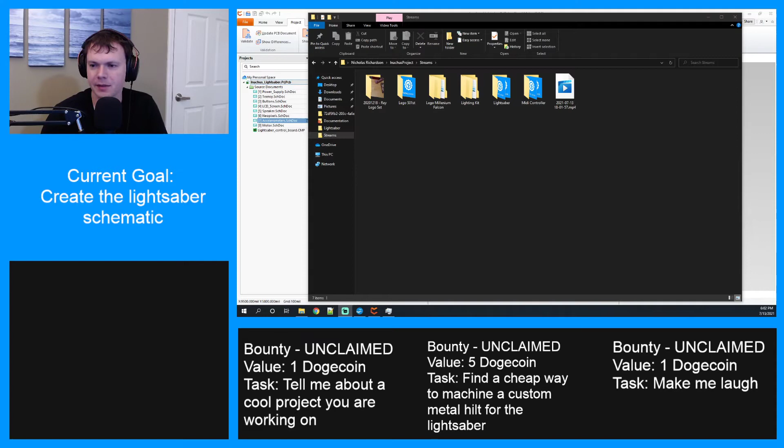We're going to be working on the lightsaber some more today. Same bounties are still unclaimed, so they are all there. And let's just get back into this. So last time we made the model for the accelerometer. So this time I should be able to just make the footprint and the schematic symbol and everything. So let me pull that up real quick.

All right. Still a couple things I need to pull up. I apologize for not having everything ready to go. The streaming software decided to just mess up right before I started, and had my microphone not working and just a whole bunch of other random technical difficulties. So combined with the Windows update and everything, it was just catastrophic. All right, but we're getting there.

Okay, so here's our bill of materials. We need to add the, let's see, not that, 2809. Yeah, okay, that's what we need to add. Where is my, I don't have my diagram pulled up. That's what I'm missing. Man, I am all over the place to start this. All right. So our two accelerometers, the Adafruit 2809, I'm going to pull those up.

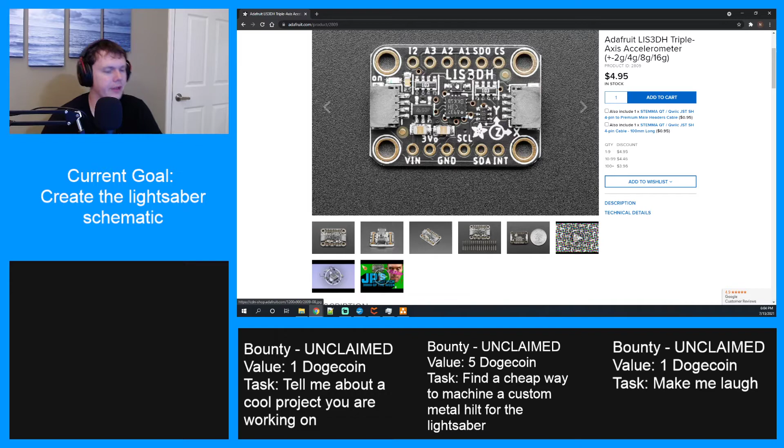And this will get us started. Okay. So it's this thing right here. So we need to go through and do our pinouts for this whole thing and make this part. And I believe down here somewhere we have a spec sheet or something. Here we go. In this file we have our layout and everything, which is what we need. Okay. So let's get started.

Parts. And then here we're going to look up Adafruit 2809. If we're lucky, we'll be able to use something that's already been made before. Okay, unfortunately, this one does not have all of the pins, so that's disappointing. Let's go to Edit. Give it a sec.

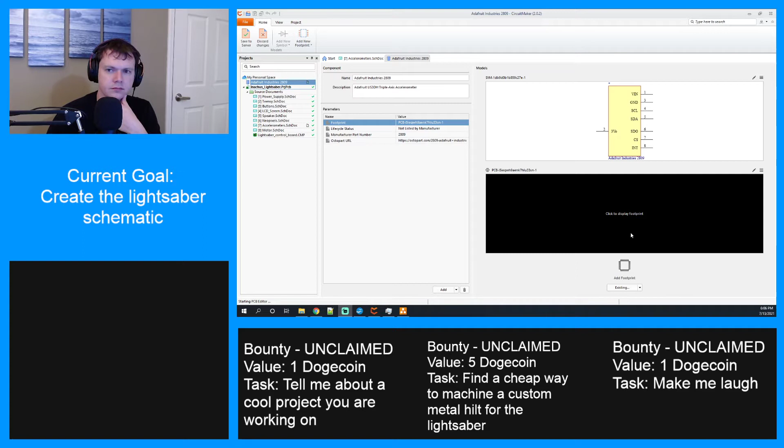All right, I don't know if this is going to display or not. There it goes. Okay, yeah, so this is an old version of the board, I think, which explains a lot. So we're going to have to modify this. So most of this that's here we can still use. So what is our... Yeah, this is definitely the old version of it. Okay, cool. At least that makes sense.

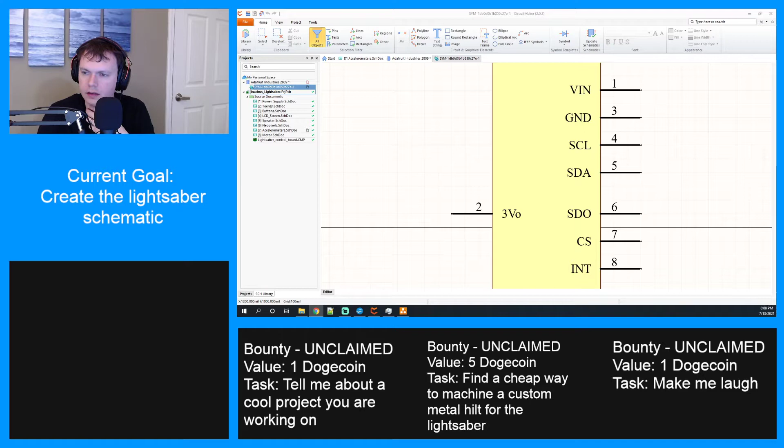Okay, let's see. If I get a better look at one of these, that would be helpful. Kind of. A1, A2, A3. Okay. So I'm probably going to reorganize a lot of this then. Well, maybe not. Let's see.

SDO, CS, SCL, SDA. It really just needs a bunch of extra ones added, and I could just throw those in up here. So I think I'm just going to do that, actually. One, 2, 3, 4. All right. So then VIN is 1. 2 is 3 volt. Ground is 3. SCL is 4. SDA is 5. Interrupt is 6, based off of this.

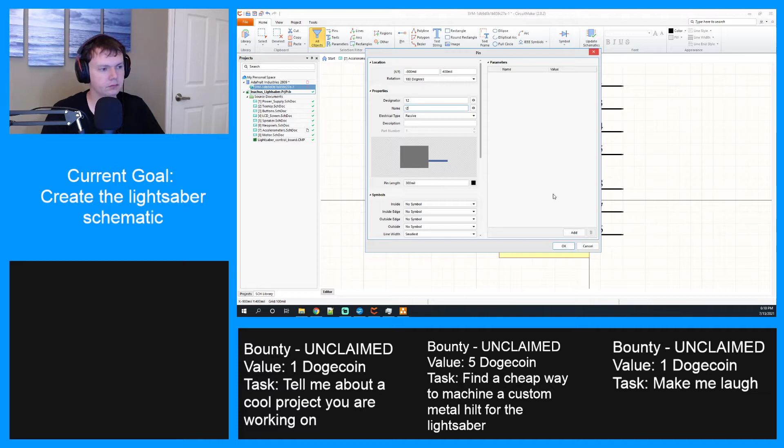CS is 7. SDO is 8. And then A1 is 9. A2 is 10. A3 is 11. And then I2 is 12, or interrupt 2, I think is what that is. Okay. So that should be everything from a schematic symbol standpoint. Let's save that.

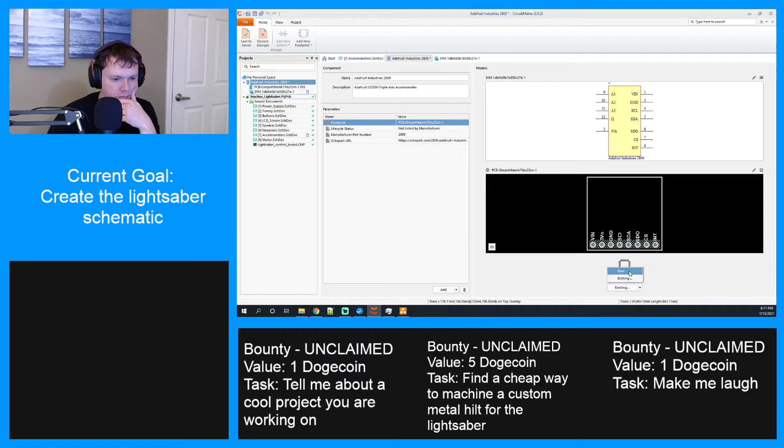And then for the footprint, I guess we edit this too. Do we edit or add? Let's just add, just to be safe. Okay. So for this, we're going to need a lot of vias. Oh shoot, what is the diameter on these? I followed some standard and I don't remember what it is.

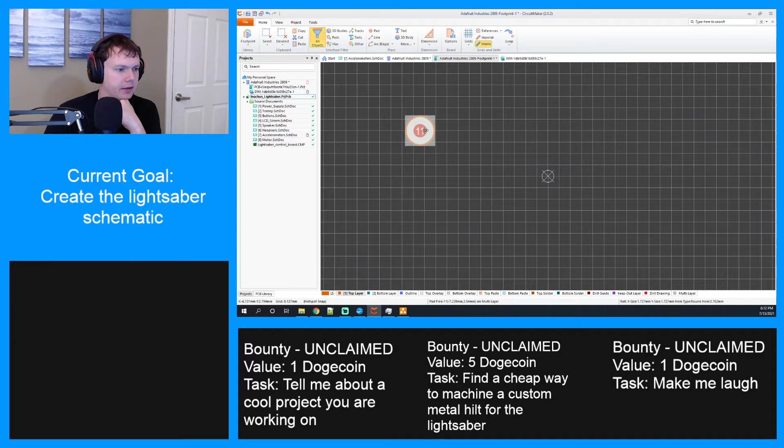Excuse me. Here, let me go look for the header that I found. That'll at least tell me. The hole is 0.9 millimeters. Okay. Let's go metric here. Okay. I'll make that a little bigger, and then there's not really much else we need to do other than name them and place them around.

I think. Oh, actually, you know what? This one I picked may not be right. Let me find. Let's pick one with the appropriate pitch. Okay, the hole size is 1 millimeter, typically. Not just this random header that I've picked. Okay. And the distance is 2.54 apart. I might make the outer a little bigger. Let's make it like 1.7, just so we have more to solder to. That's better. All right.

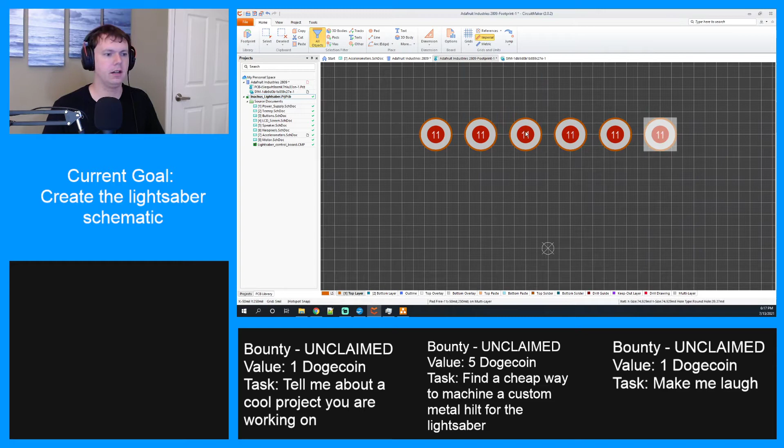Okay. Two, three, 4, 5, 6, 7, 8, 9, 10, 11. Negative 50 and 250. Negative 150 and 250. Negative 250 and 250. Whoops. All right, there we go. So that's the top row.

And then this one, basically do the opposite of that on the y-axis. Negative, well, this is negative 250 as well.

No. 50. Negative 250. Okay. All right, there we go. And now we need to rename them all from 11.

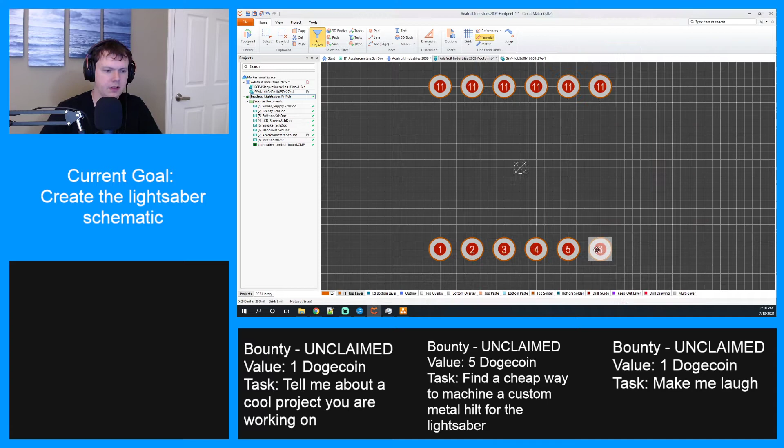So this is going to be 1, and we're just going to go around. 2, 3, 4, 5, 6, 7, 8, 9, 10, 11's correct, and then 12. Awesome.

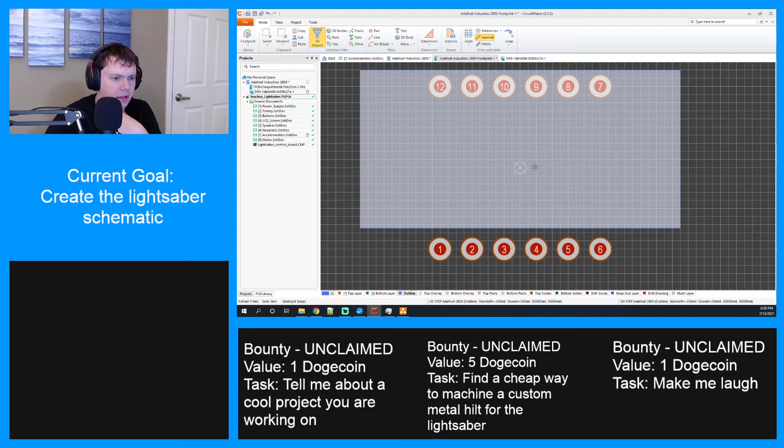Okay. Sorry. So now that's good. Let's add our model in here and then see how that does. So we're going to add a 3D body. I guess let's just go around. Okay. Generic, choose. Not that one. Hold on, I gotta find it. Okay, I think that's it. We hit OK.

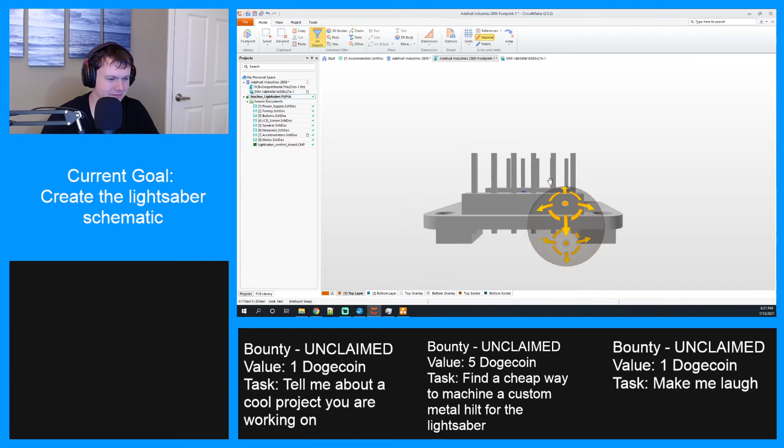Interesting. Something seems off. Right, okay. Well, it could be worse. Yeah. Alright, there's no axis in here, so we do need to rotate it. I'm assuming rotate around the X. 90? Let's start with that. Oh, that looks like it lines up better. Okay, it's upside down, but we're getting there. So let's make that 270. And then we'll probably have to move the height as well.

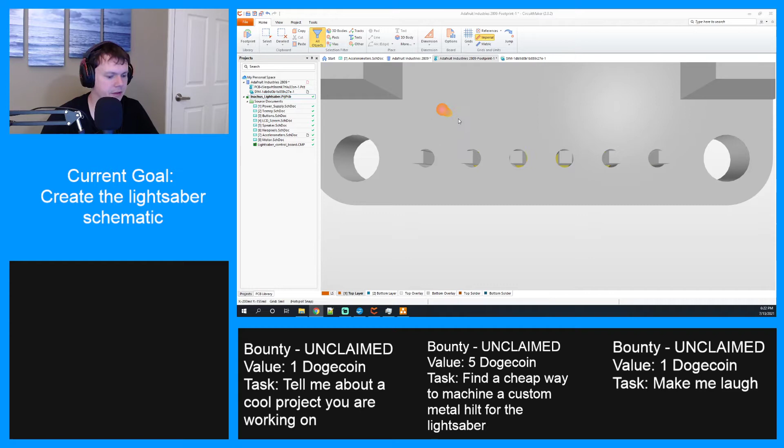Alright, we're closer. Oh, that's why I couldn't see the axis, because it was in the middle of the thing. So this should be lined up vertically. Okay, it is, I think. It looks like everything's inside is looking pretty good. Maybe. But I need to raise it up the right amount, and I don't know where that is. Let's try going up 1.5 millimeters. Alright, let's change to metric again. Alright, standoff height 1.5. Okay. Where does that put us? Not quite there.

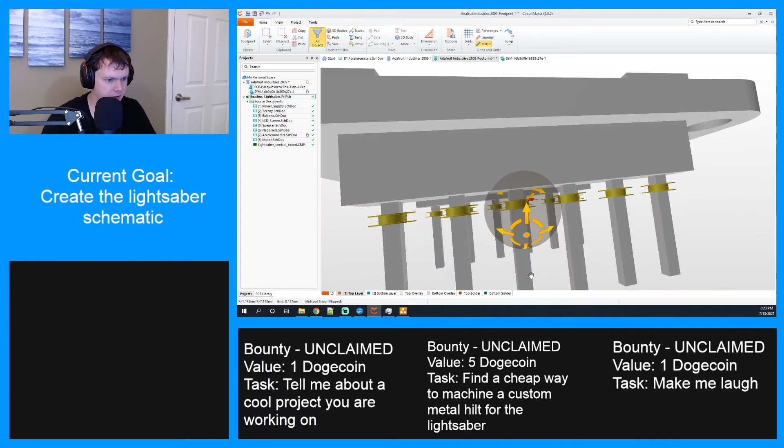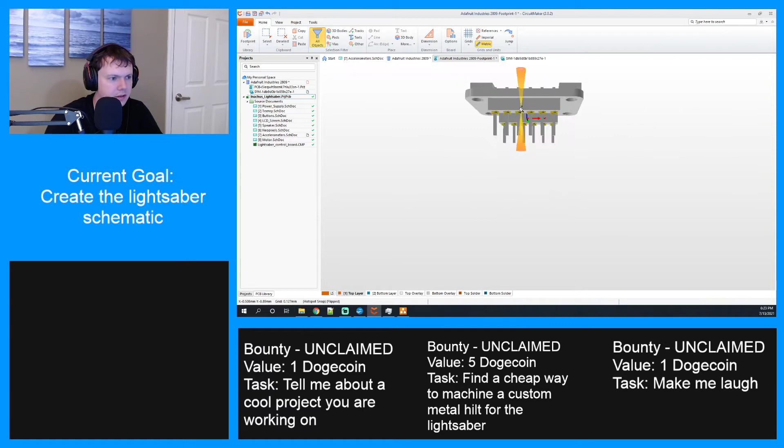Let's go to 2. Really? That's not going to do it either? Alright, let's go to 3. There we go. It's not quite that high. Maybe 2.5 is enough then. 2.6 actually, for board thickness reasons. Okay, yeah, there's a little space there. That looks good actually. Alright, let's see how we're doing. Yep, the hole size seems right. Alright, cool. So that looks good.

So now we need to do something for the mounting locations. Not that we're likely to use them, but I want to include them. I think this is really going to put in perspective too, compared to the other boards, how small this is. Just checking out these different views that it offers. Interesting. Okay, let's go back to Imperial for our measurements. All right, the next one, we need mounting vias. Do these count as pads? Can we just say via? Have it unlabeled? That makes more sense, I think.

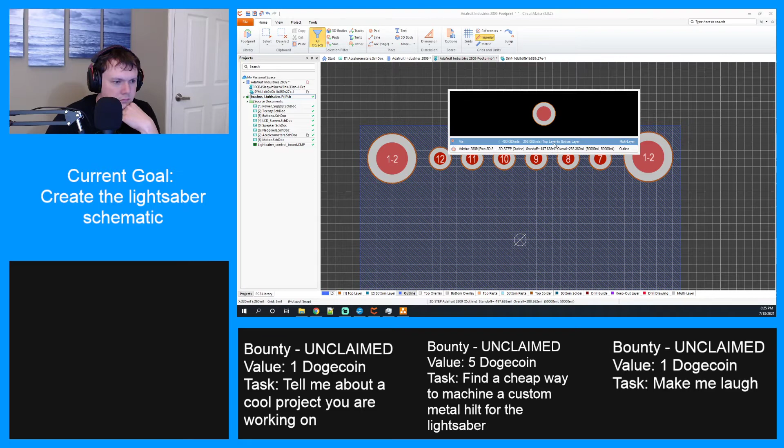Alright, diameter. I thought I set this to metric, I guess not. Oh no, I did set it to imperial. I wanted to do that. Whoops. Alright, there we go. 0.1, so 50 mil. We would want this to be 100 mil diameter. Oh, more than that actually. Maybe like 150, because the hole needs to be 100 mil. Okay, there we go. And then offsets are 0.25 up and 0.4 over. There we go. All right, let's place a bunch around.

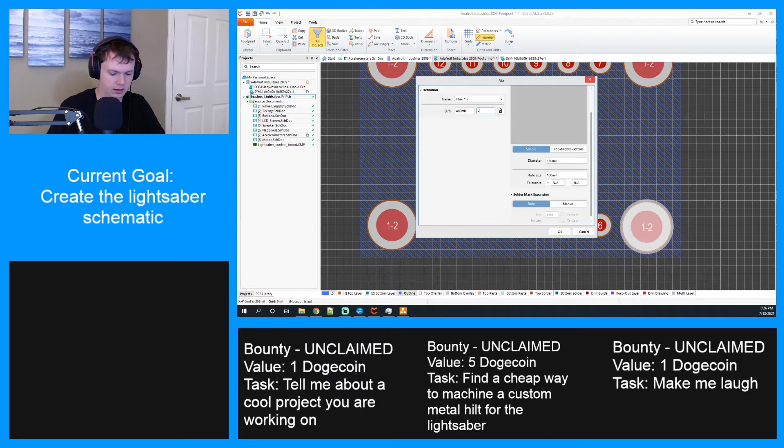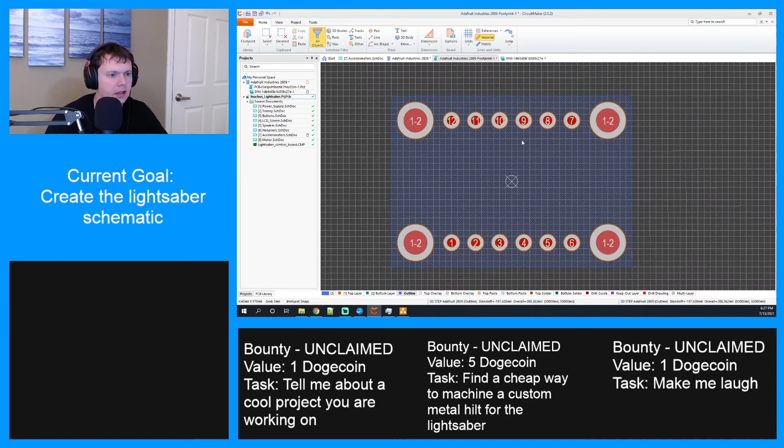Okay, so 400, 250. Negative 400, 250. Oh, shoot. Come back. Negative 400, negative 250. Negative 250. Okay. So now if I go to the three-dimensional view, we should be able to see that set up there. Yep. Oops. Looks good. I'm not sure those mounting points will ever be really useful, just because of how close they are, but maybe. I did the same diameter in the board as the upper one is, so that should be okay. Alright. That's good. Let's save that.

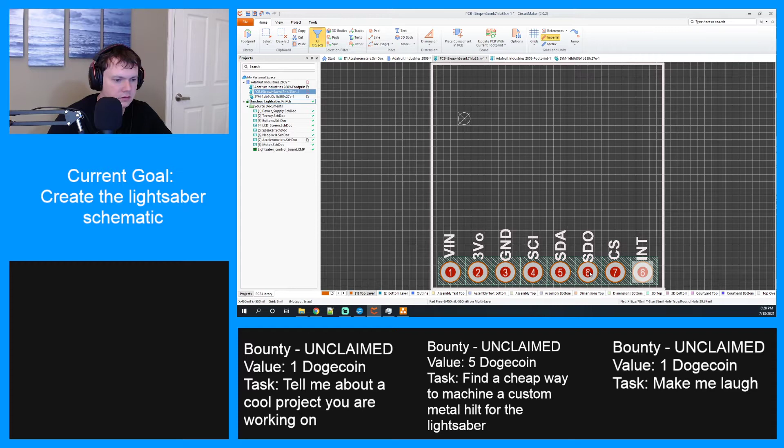I probably need to edit this one with these values in order for this to be correct, because I don't want this to be incorrect. I'm just thinking through that now. I think the only ones that are going to be correct are 7 and 8. So VIN, 3 volt, ground, SCL actually. SDA, INT. This should be INT. No, INT should be 8, so this should be 6. Okay.

Then SDO and CS are what? SDO is 8, CS is 7. So 7 is correct. This needs to be 8. And making this change will allow this to stay consistent with the schematic. Even though it's weird out of order here, it's the same as the schematic symbol, which will be good. Okay. So now we need to save this to the server.

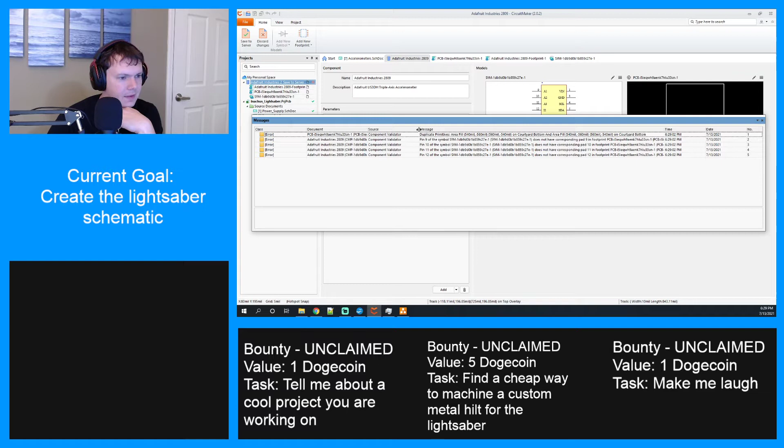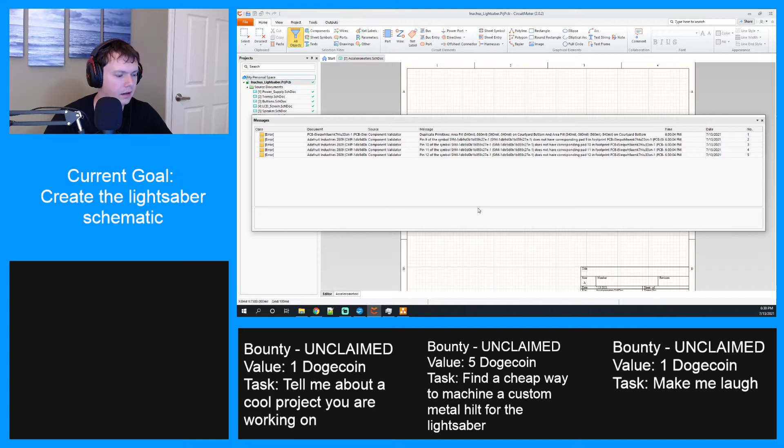Oh, validation error. No. Okay. No, don't release yet. Oh, missing footprints. That's fine. But what is this? Duplicate primitives. Area fill on courtyard bottom and area fill on courtyard bottom. I assume that has to do with the other one because I didn't do a fill or anything. This one. Yeah, alright. I'm just going to release anyway then. Let's try that again. Ignore those errors. Release anyway. See what happens. A solid strategy.

Okay. So now, I should be able to place this part. But I think the edited version is only in my favorites. This one. Oh, I might have picked the wrong one. Hold on. Come back. I want to make sure I place the correct footprint. This one. Okay. Now I can place it, and I need 2 of these. 1, 2. Okay. That's good.

Alright, I need to add these to the bill of materials now. So, our ever-growing list of parts. What was our last U component? U4 for the Teensy 4.1. I don't see any other U's. So U5 and 6 will be these ones. Alright. Don't know this one just yet. And let me see if I can find this part in like DigiKey or something. Ha, I did. Oh, and it's in stock. What luck.

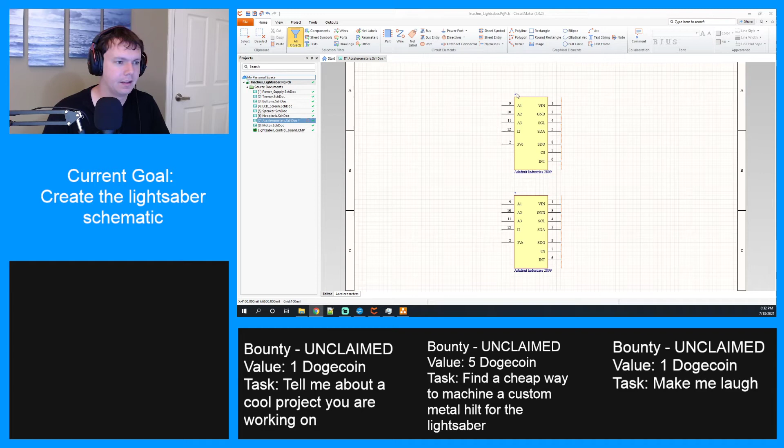Alright, part number. Try not to bash Adafruit part numbers too much, even though I don't think they're very good. They are simple, I'll give them that. But I think in this case it's kind of a hindrance. Okay. So we'll name this U5 and U6.

Okay, now we gotta figure out how to wire these up, and I think our pinout should have that we decided before. So anything that says Adafruit 2809, let's see, there's multiple, so there's a 0 and a 1. 0 will be U5, 1 should be U6. And the signal names. So we need wires to it following those names. A1, A2, A3, and interrupt 2 I believe are going to be disconnected, but I'm going to read through this data sheet, or at least Adafruit's article on it, and see what I need to do to connect up everything else.

Okay, Adafruit 0. SDO, okay. Let's just get a bunch of wires out. Because all this will likely have to be connected. I'm not sure what this does. I'll run it out anyway, but I don't see that being used. Okay, SDO is MISO. Just do net labels on everything. All right, master in, slave out. So that's the data going back. So that's the data that our actual G-force data is going to be coming back in on that line right there. So that's the first one.

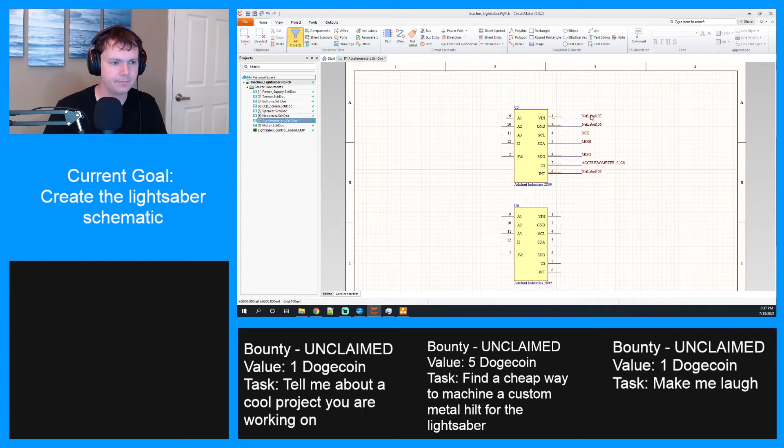Oh, okay, so 3V out. This is an output pin. We actually don't need this. Because we're not going to be powering anything off it. I wonder if it makes sense to connect that to anything. I don't think so. All right, let's just disconnect this whole wire. And then this is going to be 3V3. Obviously, this will be ground. Actually, I don't need to label that. Hold on. Let's just get our ground power port. Oops. There we go.

Okay, and then the INT, what is that? So for SPI, we need SCL, SDA, SDO, and CS. INT is an interrupt output pin. So you can configure some sort of interrupt to fire when you... That's really cool, actually.

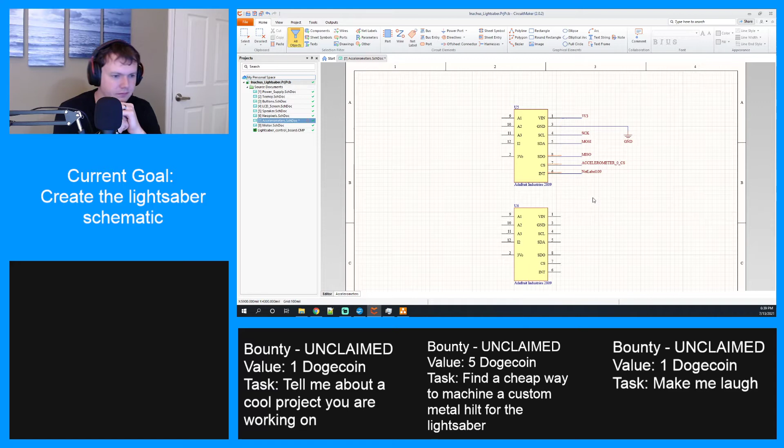Both of these, I1 and INT, are interrupt output pins. I could see that being useful somewhere. I have a limited amount of I/O left on this board, though, so I don't want to just use them unnecessarily. But I see that that could be useful in the future, rather than possibly missing data.

So I think I'm going to include that. I'm going to leave it blank for now, but I am going to include that when we do a run through again to decide what the remaining I/O should be. That'll be included. Why is this red? It is connected. Oh, it's probably not on the Teensy. Okay, let's do the other one, since we have to do two, and then we'll go ahead and wire up the Teensy with everything as well.

I can't wait to see this in the, oops, here, let's place a power port. I can't wait to see this in the 3D view and everything. I'll do that once I get all these wired up with the Teensy and everything. I'll export the changes and show the circuit board. Okay.

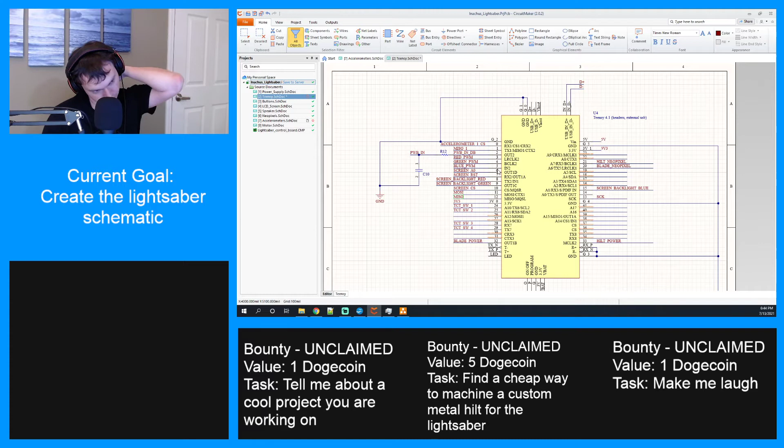Okay, so pin 0 is accelerometer 1 CS. Probably need to move that out a little bit, actually, so we get some room there. Okay. All right, what's pin 1? That's MISO 1. All right, pin 12 is just MISO. This one. Oh, man. All right, I missed one. MOSI already exists, so I don't have to worry about that.

All right, accelerometer 0 CS is on pin 36. Okay. I missed 26 and 27, I believe. Yep. 26 is MOSI 1. 27 is what? SCK1.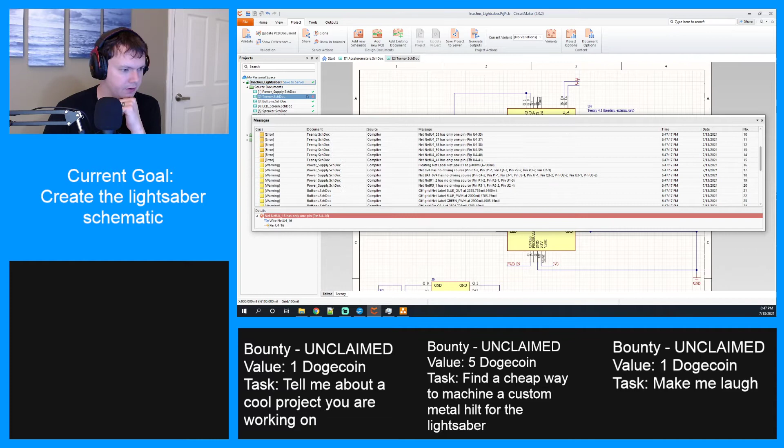All right, pins 30 and 31 are spoken for, but I don't think I'm doing anything with those yet. Yep. Okay, and then that finishes that. I did accelerometer 0 CS. What's next? I think I've almost got them all, or that might be all of them. Yep, okay, because the other things were already in there. So it looks good. If we save this and go back here, yep, nothing is red anymore, so that's good.

I just realized this is going to throw an error when compiling because of all these unconnected lines. But let's try it anyway. Validate. Net so-and-so only has one pin. It's going to make me go through and fix that. Fine.

I really do need to see what this looks like on the circuit board because I need to get an idea of our spacing. Because I know that we are definitely getting close to running out. All right, let's compile. No issues.

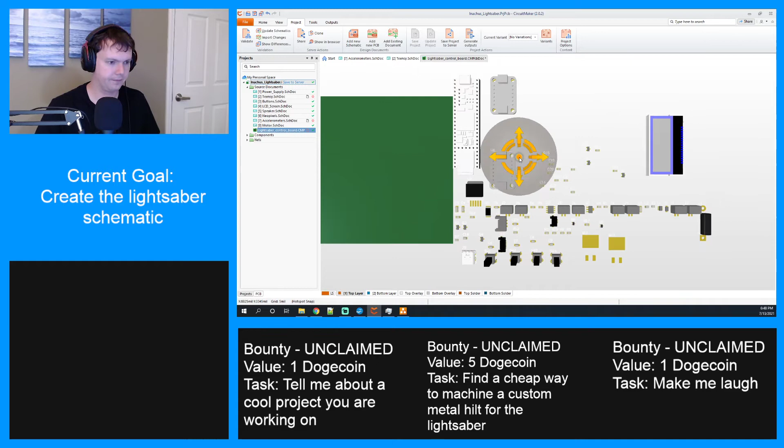Let's push the updates to the PCB. Validate everything. Unknown pins are weird. Execute. Everything executes just fine though. Yep. And there they are. All right, come here. Let's pull this out. Give it some space here.

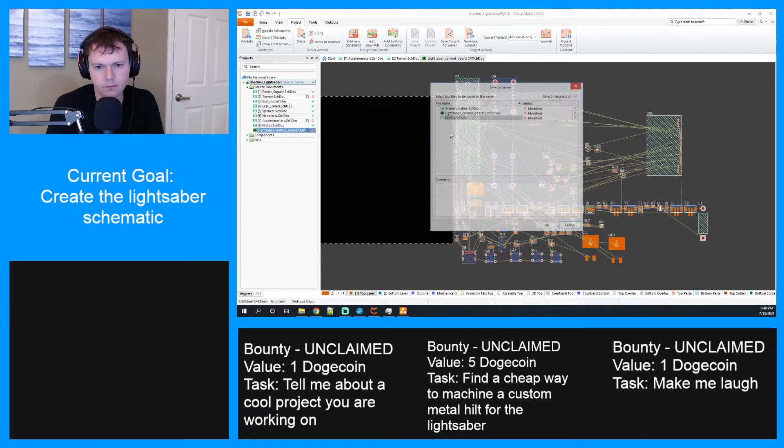All right, all our components so far. Let's see how they compare to the others. Oh, that looks cool. And our little USB-C port. I still like seeing that there. It's such a cool model because we were able to download it rather than make our own. All right, that looks good.

All the connectors and everything is still looking good. All right, I think that's done. Save that. And let's save the whole thing to the server, just so everything's backed up. All right. What is next? I guess we've done pretty much everything except the speaker and the motor. Motor's probably easier. So maybe we do that one next.

I was thinking the other day about this motor too. There's a few things we gotta solve here. A, we have to get some connectors for it. So that's gonna be a little tricky. And then B, motors use a lot of power, and I probably need to double check how much current this motor is going to be using.

I don't know if we can supply enough. I know our batteries can supply a ton, like 8 amps or something. But this voltage regulator is going to be struggling. It's already going to be maxed out with the lights on the blade mostly, so we might need to see if we can find something even better than this one. But I don't know on that yet.

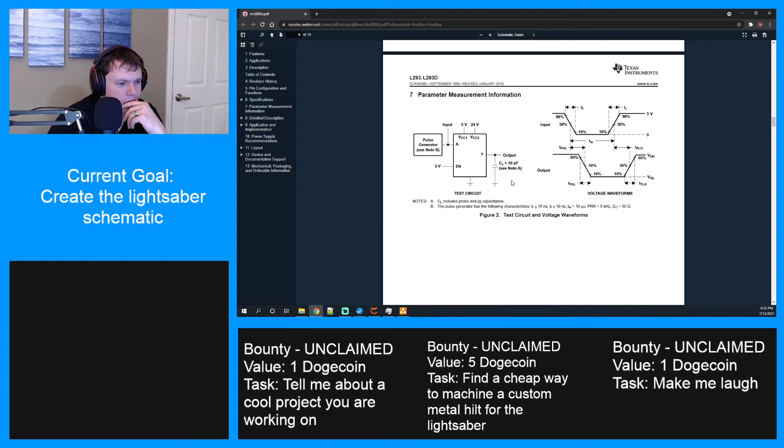All right. So here's our data sheet. This little chip is like $4 because, notice the heat sink and ground requirements here. There's a strong possibility that this thing's going to get hot, especially pushing half an amp through it if it needs to. All right. There'll be an example in here somewhere. That's interesting. Okay. Parameter measurement. We're not doing anything like this. We only want it to go one way.

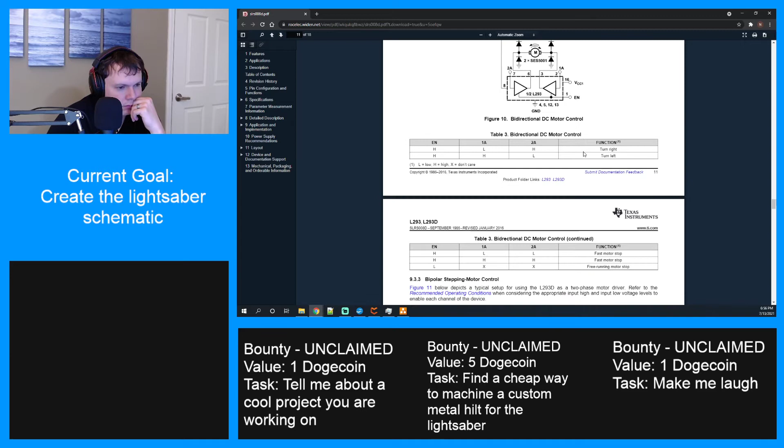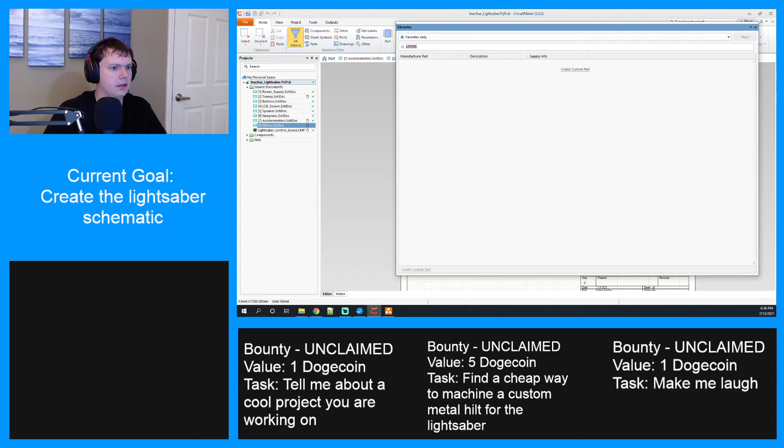Oh wow, this thing can supply up to 2 amps. That's why it needs those heat sinks. Jeez. Okay. Typical application. Inverted, yada yada. Looks like it has pull-ups on the enable lines. Oh, that's for a 2-phase motor driver. I think I just want something a little more basic, right? All right, well, there's a lot going on here. So let me just start by getting the part down. Close this. All right.

So for our motor, we need to place a part. And chances are that this part does not exist, at least doesn't have a footprint. Let's go all parts. Oh, it does? Oh, but it's wrong. But the footprint is right. But the symbol is like something else, which is probably similar enough to be used, but I really don't like that. I'm going to edit it.

Four, 5, 6, 7, 8, 9, 10, 11, 12, 13, 14, 15, 16. What is it? 4 and 5 are the heat sink. Yeah, so this is definitely something weird. All right, let's edit this.

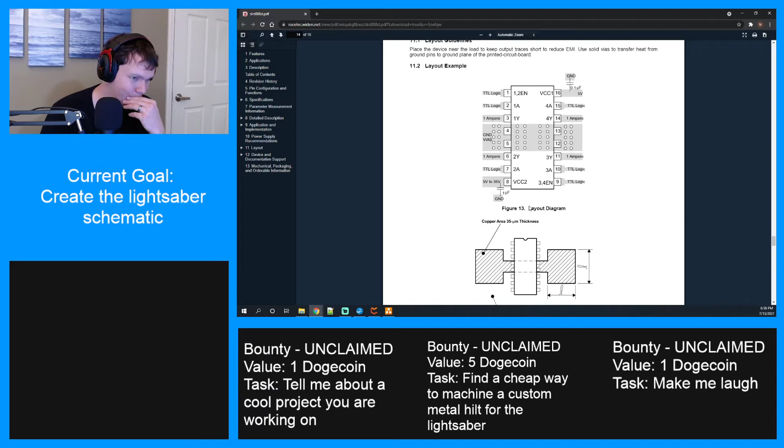See what we can come up with here. I think this footprint is correct. I will double check real quick, but I'm willing to bet it is, because it's a pretty standard size package. Real quick.

Look at this awesomeness. In the recommended layout, these ground pins are all one big plane with vias going through them to spread that heat out into as much copper area as possible. That's fun. All right, good to know. And good to know on the capacitors as well.

Where is the footprint? It might be in a different document. This is like a standard package, so okay. It looks like, yeah. Oh, wait. Technical documents. Click here. The page on the TI website will hopefully have it. Package PDIP NE. All right, well, there's a schematic of the package, but they still haven't given us a footprint.

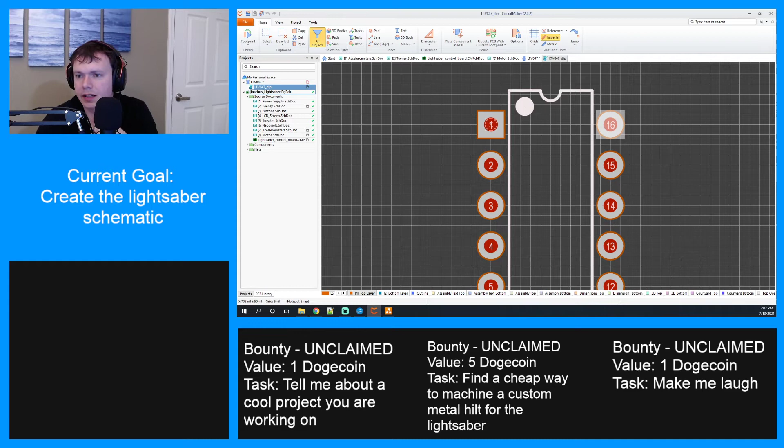Spacing. Yeah, I'm just going to edit this real quick, and let's just check if the spacing is reasonable. So that's on 0, 0. So what's this across at? 0.3 inches across. Yeah, that seems about right. And then the pitch is 0.1. Is that negative 100? Yeah, okay. This is correct. So I can just ignore this. No changes required there.

All right, this definitely requires changes. Also, why did they name them backwards? Why 1, 2, 3, 4, 5, 7, 8 on that side and then... I'm just gonna let it go. All right. Here we go. All right, so I'm actually going to switch the numbering. So this is 1,2 enable.

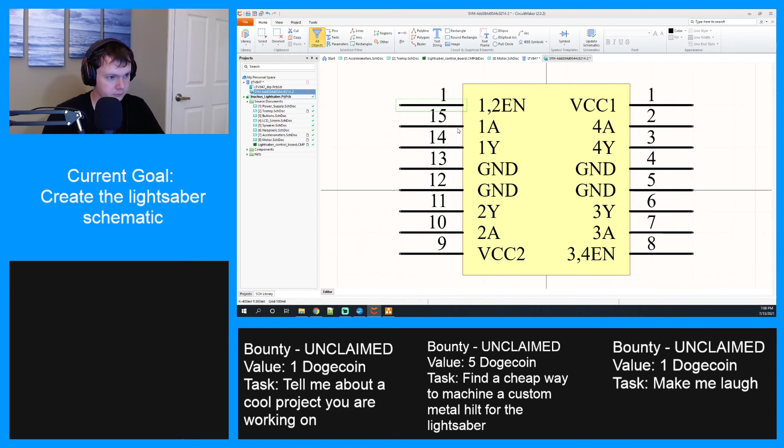Logic supply current required, milliamps. Quite a lot. Oh, wow. Level, all outputs at high impedance. There could be a lot going on there. We might have to use buffers for this. Yeah. Just in case. And some pull down resistors maybe. Interesting. Okay. So there's still a lot going on here. I need to renumber all this. Let's just start with that.

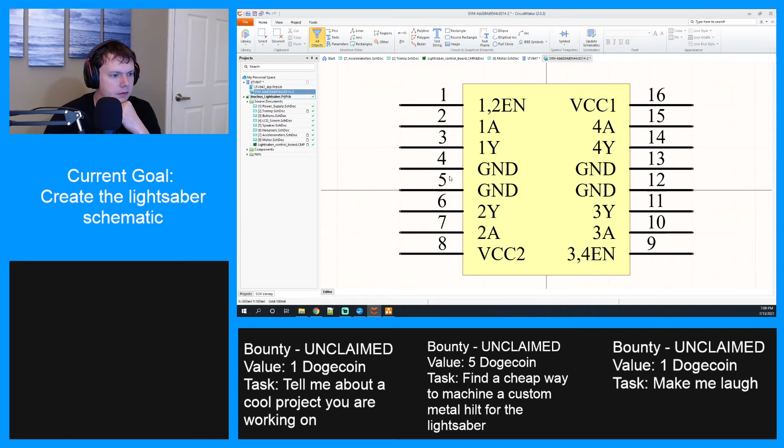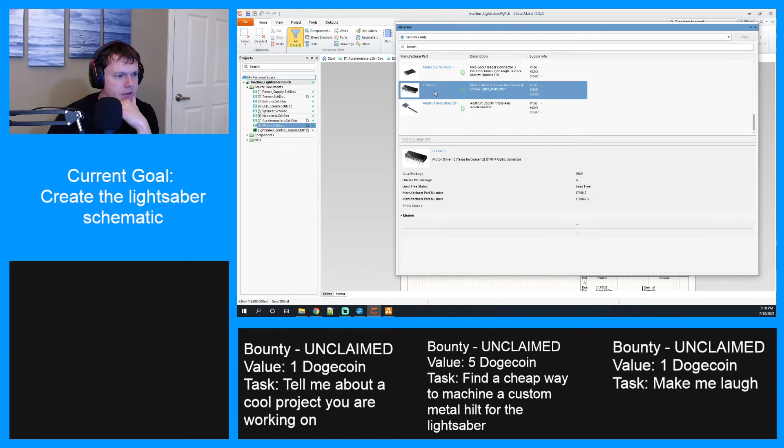Nope. 4, 5, 6, 7, 8, 9, 10, 13, 14, 15, 16. All right, cool. 2, 3, 4, 5, 6, 7, 8, 9, 10, 11, 12, 13, 14, 15, 16. That looks good. All right, so I think this part is done.

Now it's just a question of how to wire it all up, and that's going to be quite complicated. But first, let's make sure this is good to go. Okay, and then we will place the part. Where is it? Really? It didn't... Can I edit this again? LTV847. I need to change that.

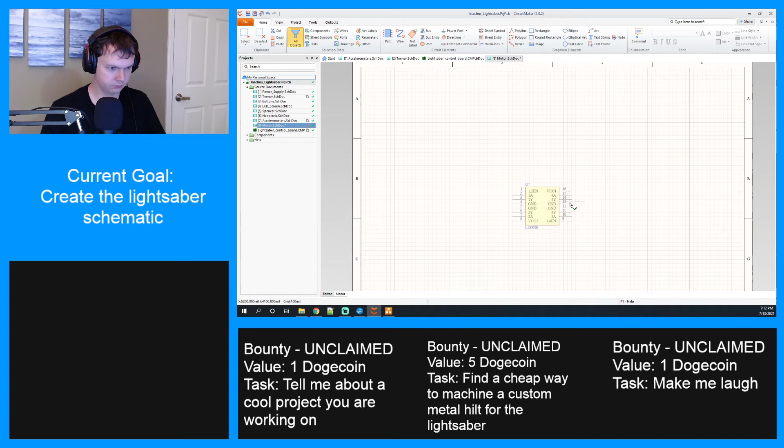So this is L293NE. Okay. Save that. That should update that, hopefully. And save that to the server. Okay. Now let's try it. NE. Why does it say 6? Whatever. At least the naming is mostly fixed. All right, here's our chip.

I don't remember how I'm supposed to connect all this up. Okay, so motor enable is pin 1. Motor 1 goes to pin 2. Motor 2 goes to pin 7. That's connected to the Teensy. And then I guess the Y is the output. Okay, and then I know for a fact 5 volt goes in both those. So we can do ground and 5 volt first. Actually, first let's line this up. And then draw our wires out.

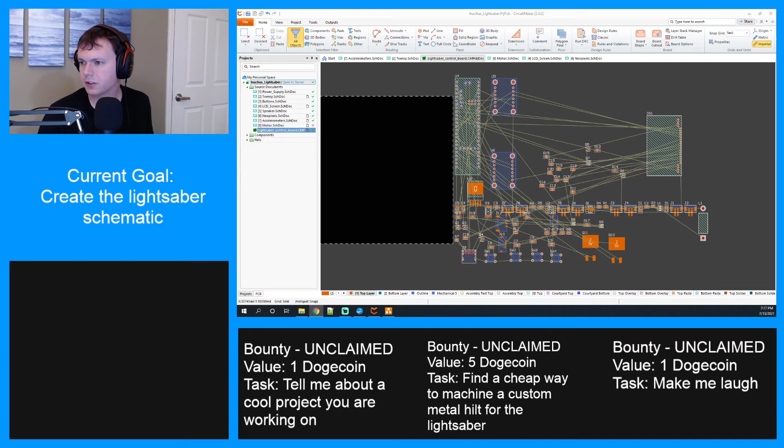Yep. This part, Q10, Q11. If I go here, where are those? Q11, Q10. Those are enormous. I don't need that. I need 60 milliamps at most. So I'm going to have to pick a different part. Dang it. All right, let's pick something else. We want P channel, in stock, active, apply all, and then we really want like an SOT23 package. Let's just pick all the SOT23 packages. See what we get. 116 results.

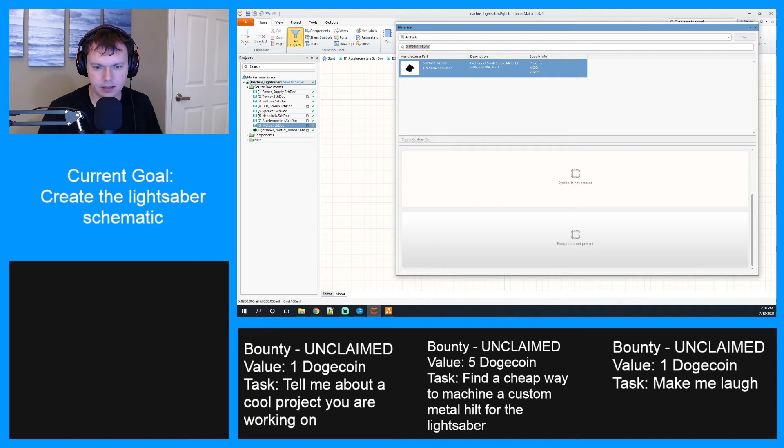I have one that I've clicked on before. I must not have used it. Don't know why though. So I'm gonna need 1, 2, 3, probably. Let's see if I've searched one before. For whatever reason, I didn't pick this one. Probably because there was no model. All right, I think I want the SOT-23-3. A lot of great options. Let's see what we can come up with. Just trying to find something that's already been made. Nope. Wow, Toshiba does a lot of this stuff. It'd help me a lot if I don't have to make the package myself.

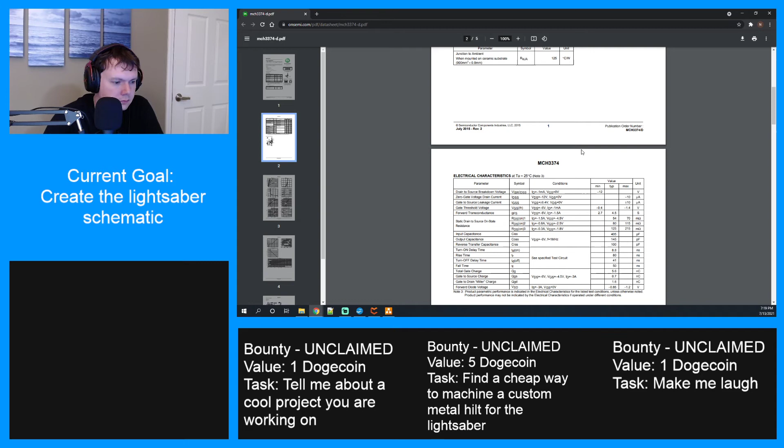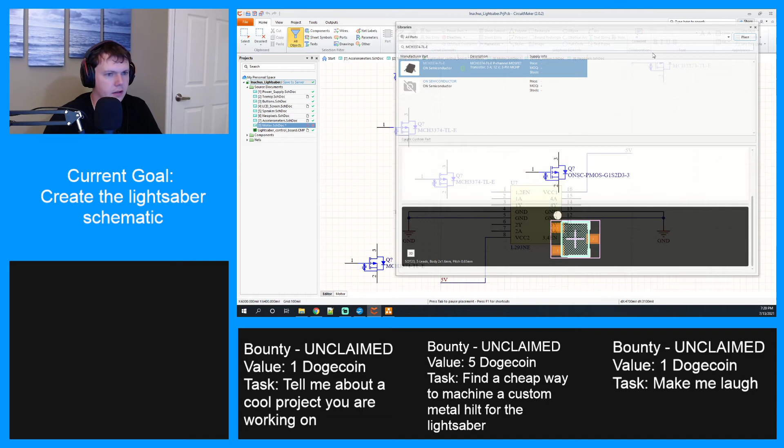Okay, this one exists. Let's do that. They are in stock. Hang on, just gotta check through everything again. Huh. Show voltage. Interesting. Yeah, still some stuff I need to learn. I think this will work for now, but I might have to change something on the fly later. All right, let's place it. 1, 2, 3. Okay. Q12 through 14. All right, let's add that to the bill of materials.

Oh, I guess I got to add this part too. So 7, and then Q12 through 14. All right, real fast, let's add this stuff in. All right, that's good. And then our little FET here. Part number. There it is. Doing good. Now, how did we wire this up before? We did it on the NeoPixels, right? So power, this was data. So power on the bottom. Oh, they're not running the same way though. Out through pin 2, I believe. Okay. Yeah. And then into the device.

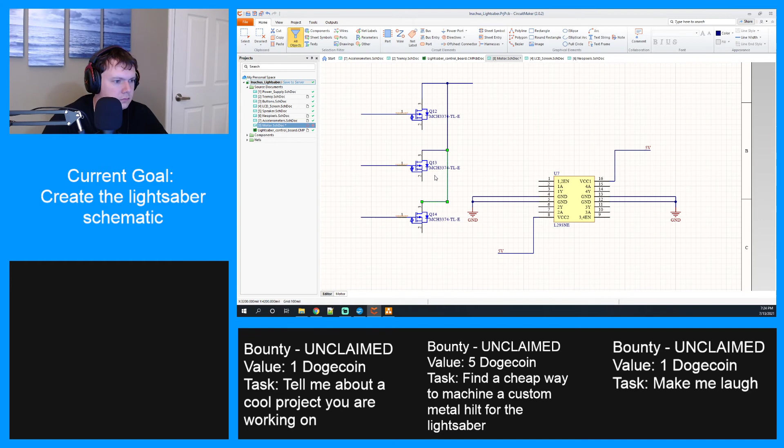Okay. So how are we going to do this? Probably just go way out, actually. All right, let's run control lines to all of them and power to all 3. And the control lines will need pull downs probably. In fact, let's just move everything over. There we go. All right, and then we need 5 volts. And then I'm actually going to turn the name off on all of these. Turn the comment off.

All right. How's it going, Beth?

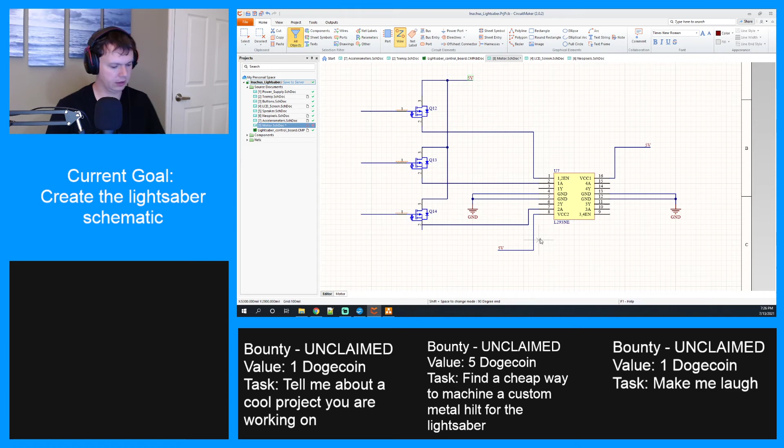We need this to be 5 volts. All right, and then I believe A is the input. If I check here, three, 1, 2, 7. Yeah, okay. So we need to run a wire from here to our enable. One from here to that input, and then one from here to the input down here. There we go.

Good. Glad your Tuesday's going well.

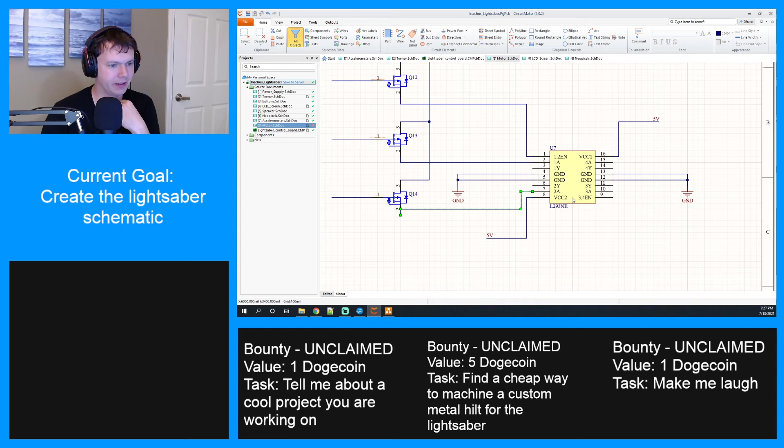Okay, so now we need to name these. Oh, I might have messed up on this. We might need more than this. Aux 1. Did I pin out everything on this device? Nine and 10. Do I have something for pin 15? Because that would be epic if I did. No, I don't actually. Interesting. Oh, yeah, I do. Yep. Dang it. I thought I almost had it. Okay.

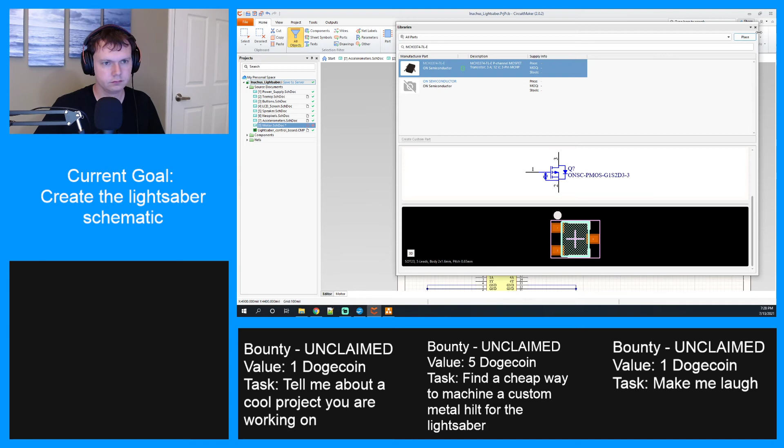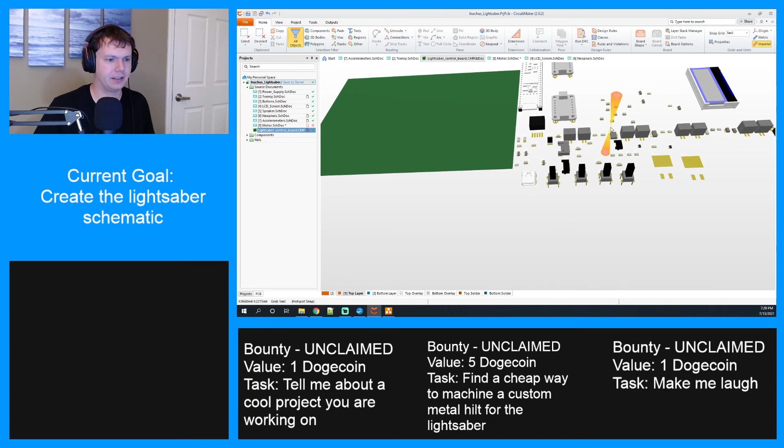We need to organize this a little better, or this is going to go nuts. Okay, give me a second. So let's take this, slide all this down here. All right, then I'm gonna delete this. I'm basically gonna redo it all. But I basically need like 3 more of these. Okay. Let's slide these up.

Whoops, don't need a part, need wires. There's just so much going on here. But we'll get there in the end. I'm curious to see, especially here too, how much space it's going to take up on this thing when you consider all these circuit elements, because these little pieces are probably about this size, but there's going to be a bunch more of them. There's going to be like 6 more, plus that chip. So yeah, this is going to be great.

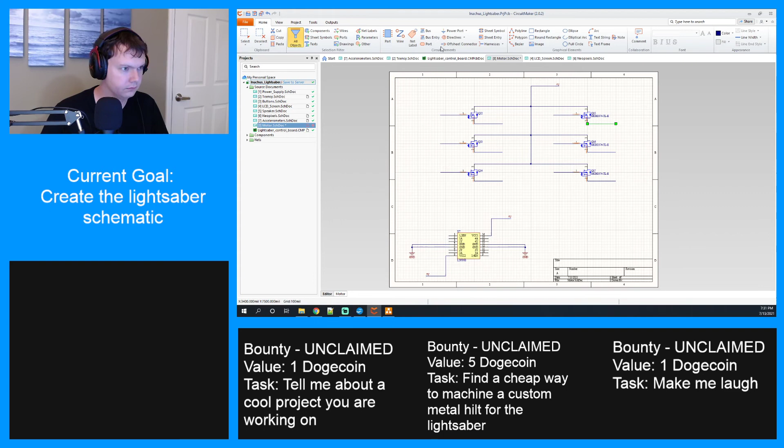Okay, I think we confirmed from here the way this goes. Yep. So those are the lights. So power to the top. All right. I'm just going to run these across. And then run this up the middle. All right, and then this will be our 5-volt line. 5 volts. Okay, so now our outputs are going to run this way.

Can't believe I decided to wire this whole thing up. That seems like a terrible idea. I guess I'm planning on doing connectors on this or something, or a header or something. I didn't even think about that. The outputs haven't been defined. Okay. All right, then in each of these, we need to go through and add these signals.

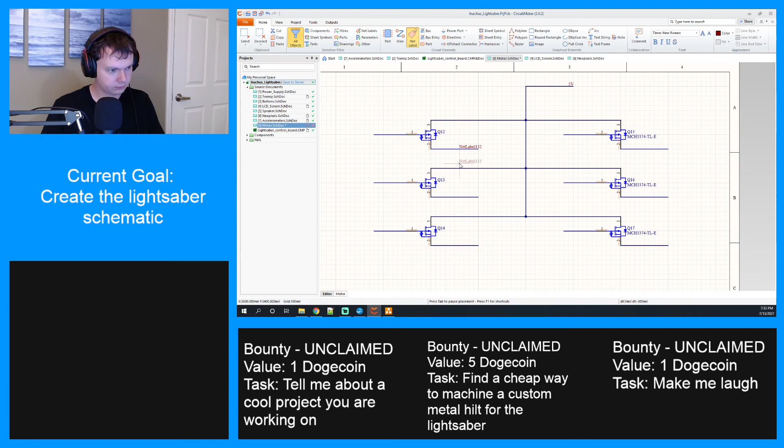Okay, so I guess I gotta come up with names for these. I could just name them based off their pins. 1,2EN, 1A, 2A, 3,4EN, 3A. I don't know if I should use a connector for this or what. I guess I would only need 8 pins on a connector. That might be the good solution right there.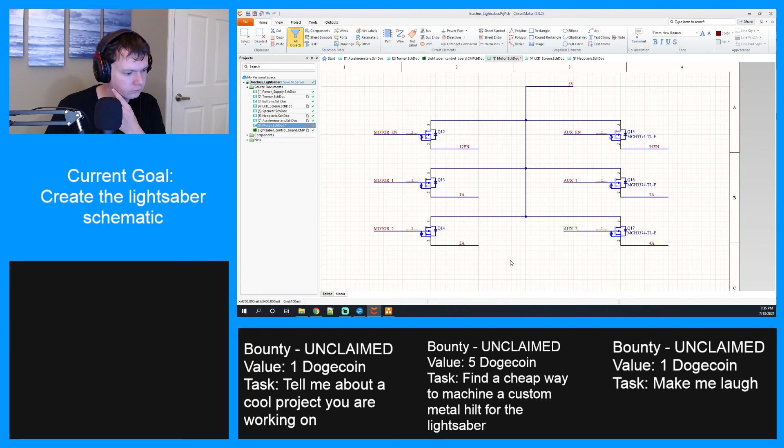Okay. Not a wire, I need a net. 1,2EN, 1A, 2A, 3,4EN, 3A, 4A. Okay. And then from there, I can name these things. Motor enable. This is motor 1. Motor 2. Aux enable, evidently. And then aux 1 and aux 2. All right, perfect.

What else do I need? Oh, I need to add those to the Teensy, and I also need over here. Oh, actually, I'm going to put them on these lines here to make it easier to understand. I need pull-down resistors on everything. Yep. All right, so I just use 10Ks, because they don't need to be strong. Well, I don't know what the leakage current on this would be. It shouldn't be a lot. It would be a tiny amount.

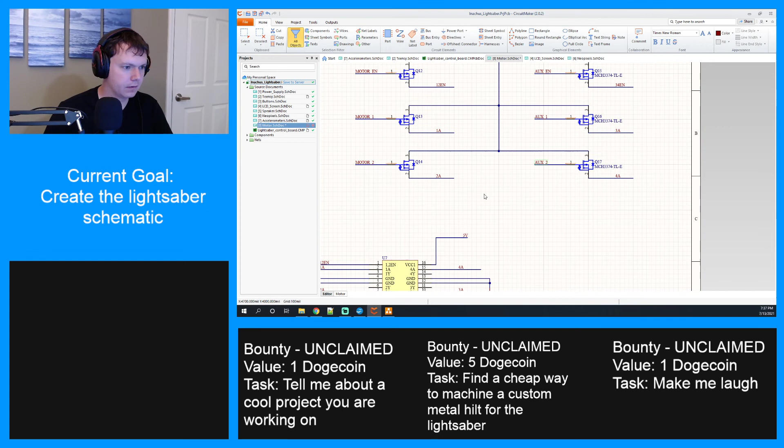Hold on. These things always have a slight leakage current, so let's just figure out what that is. All right, gate-source leakage current is typically 10 microamps. Doing a quick Ohm's law. Microamps are tiny, but let's just double check. We just need to make sure that we can produce a bigger current than that. So, V equals IR, 5 divided by 10,000 gives 500 microamps. So that'll be enough to drain it. And I think I just realized that my spacing here doesn't really make this easy to do. Well, maybe it does.

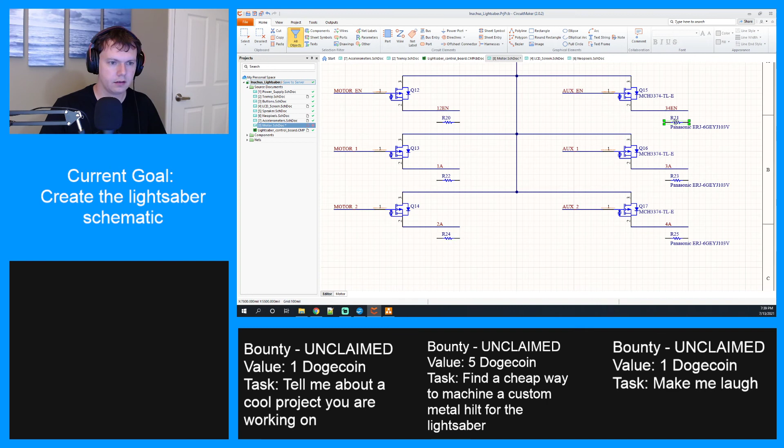All right, so what 10K resistor have I used before? And then I need to add capacitors to the VCC lines as well. I know I've used a 10K somewhere. Okay, here we go. And here, I think I found it. So let's look for this part. Our friend the Panasonic resistor. Just gonna drop one there, one there, one there, one there, one there, and one there. All right, and then I want to turn the name off on all of these. Oops. Okay.

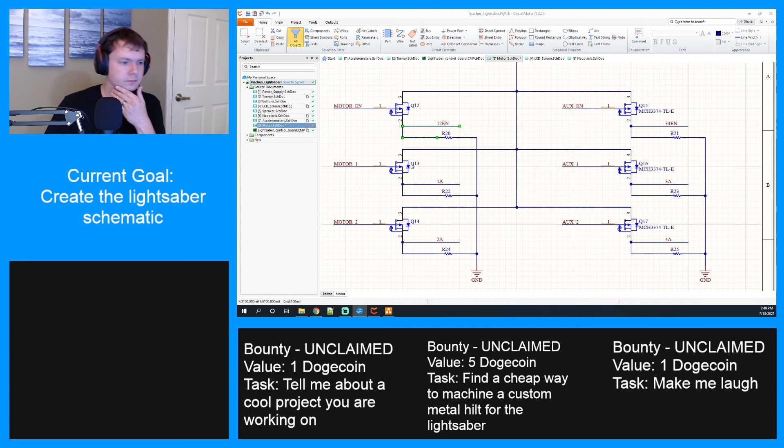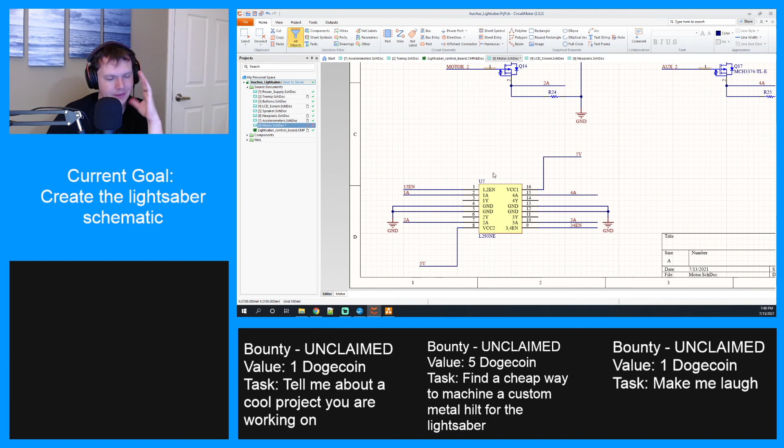All right, then I need a ground. Probably right there and right there. And then wires. All right, and then these will all be connected to these enable lines, or control lines. And then I need to add that into my thing here. So through resistor 25. All right, that looks good. Now,

now that I'm thinking about it, since we're powering the chip off 5 volts, it might make sense to have a control line on these as well. I'll add it to my list of items to check on later. No, but I feel like I should check on that now. I'll look at that next time. I want to finish out this part. All right, so we need capacitors, and I saw some examples in here on this particular chip.

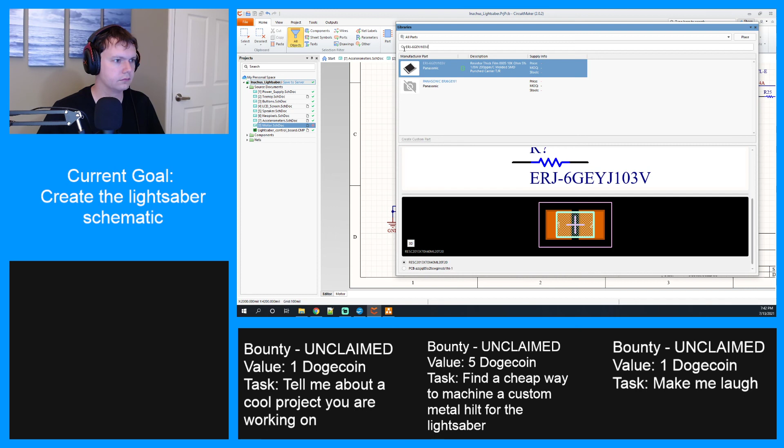Let's see. Here we go. Might need capacitors on the outputs as well, if we want them to stay stable. Here we go. Down here it recommends 0.1 microfarad on the 5 volt line and 1 microfarad on the power input. So I believe I have both of those available already.

Yep. So 0.1 microfarad is this one. And then the other one, the 1 microfarad. Goes there. All right, so the 0.1 is C21. And the other one is C22.

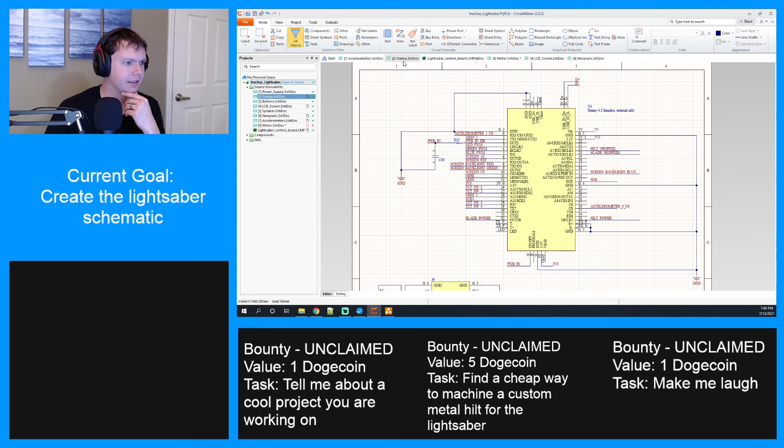All right, let's flip that 90. Same with this one. There we go. And then, okay, that one's already connected accidentally. There we go. And that one will go there. All right, and then power port, we need a ground. Or I guess we could just connect directly to the grounds. Okay, so there's our capacitors in place.

All right, so there still might be some stuff that needs to be done here. We also have to decide a connector for the whole thing as well. But I think this is a good start. And then let me go ahead and, oh, we need to add this stuff to the Teensy. I'm trying to wrap this up. I'm so tired right now for some reason that I really just need to take a break soon before I make a mistake.

All right, so pin 37, 38, 39, 40, and 41. 37, 38, 39, 40, 41, and then one more, 14. Okay. And then I don't think we need a whole lot of space, so let's drop one there, one there, one there, one there, one there, and one there.

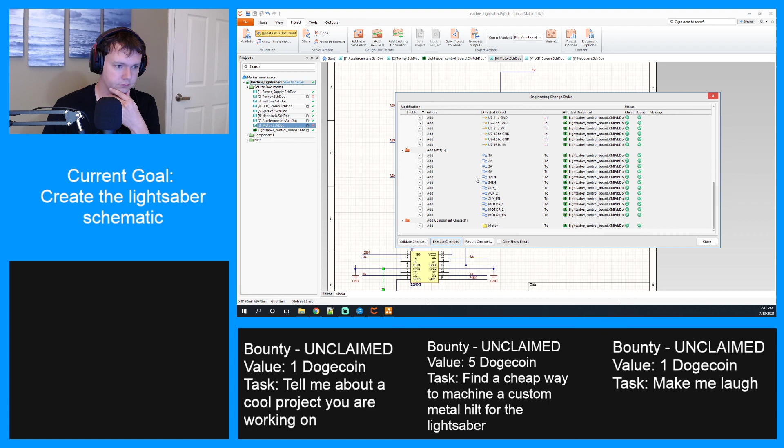All right, 37 is motor enable. 38 is motor 1. Motor 2. Aux enable. Aux 1. And aux 2. Wait. 41 is aux 1. I missed aux enable. Hang on. All right, there we go.

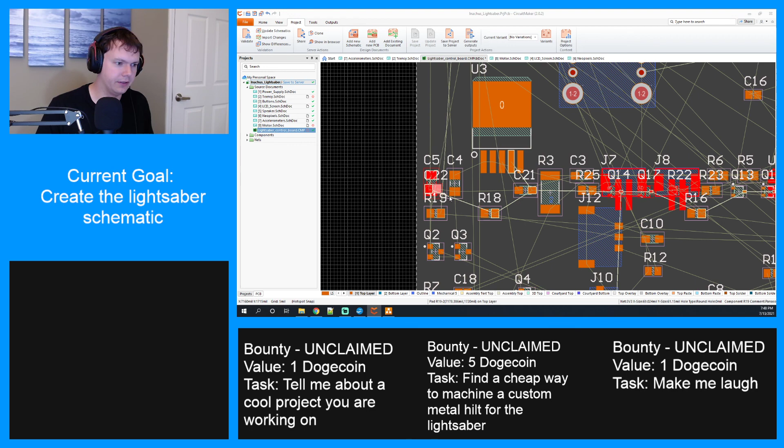So now I'm going to take this, compile everything, push it to the board, just so we can see it all there. No errors, good. Lots of changes to make. Okay, so much stuff has collision warnings. Hang on. There we go. And I'll just try my best to move everything out here. Man, it is going to be incredible to try and fit everything on this board.

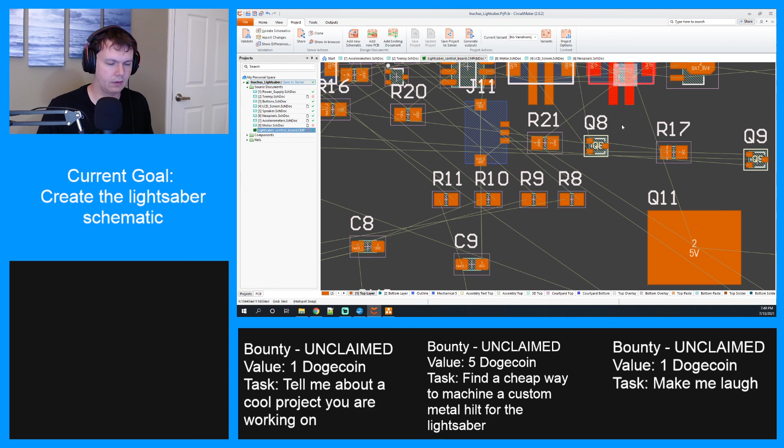What are these? Collisions. Oh, just resistors that are in here, I think. No, what's this? Yeah. Our little FETs. So much going on here. Just try and drag everything out. I give up trying to put it all up here, but... Okay. Everything all spread out right there.

I think I'm going to seriously have to think about how the heat sink on this is going to work, because it's not going to be trivial with as much energy as this board's going to generate. All right, if we go to the 3D view here, we can look at everything. Oh, really? What is this? I might have to go in and change this model, because that looks horrible. Alright, we're getting close though.

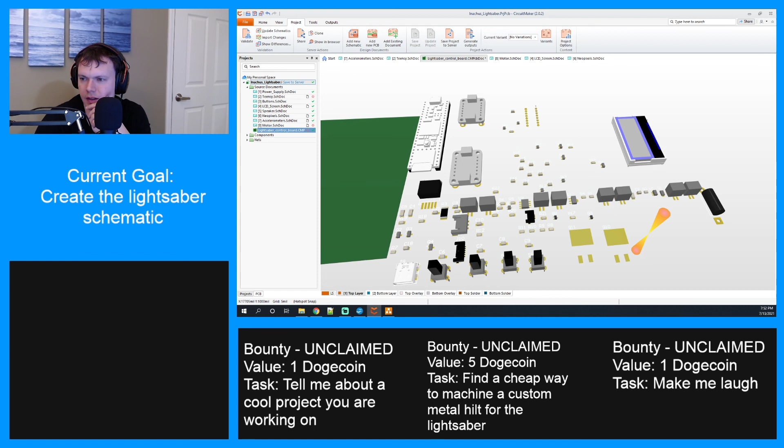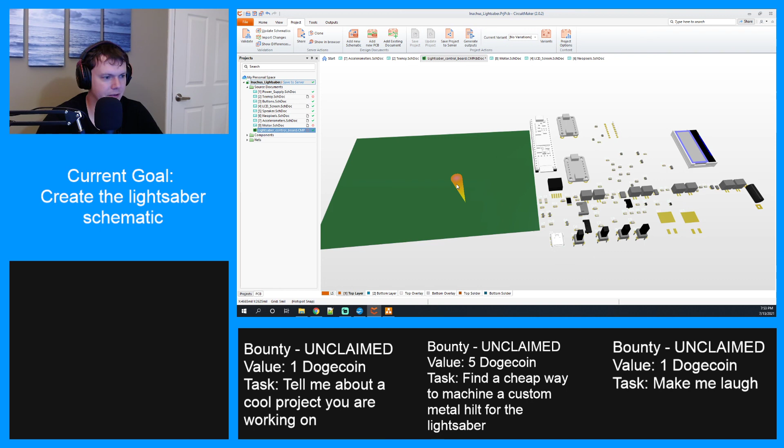Interesting. It says it can supply a lot of current, but the supply currents are showing levels that don't match that. Like, they're showing small levels. And I need to know, like... Huh. I'll have to examine this a little more, or I might have somebody who knows better what they're doing than I do teach me about this.

If anybody has any tips, please message me. Apologies for not having it on the screen, I'm looking at this H-bridge data sheet, just trying to figure out how much current this is going to use while it's not being used, like if all the motors are off. That's why I want to have a way to turn this chip off, just in case.